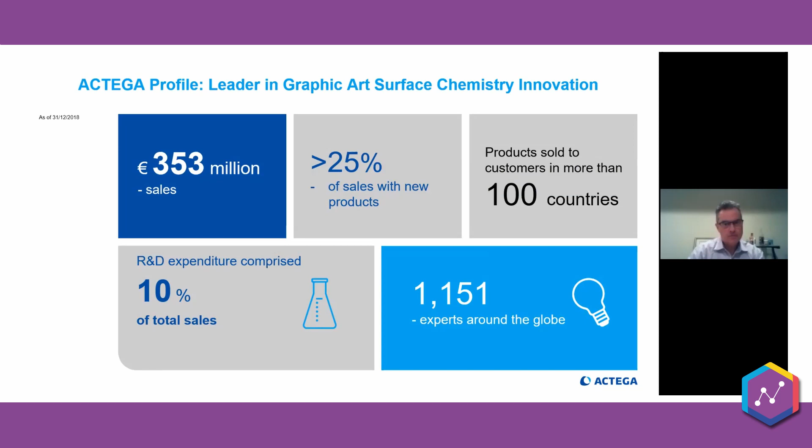We have basically a global footprint, with about 1,150 experts around the world supporting our growth. This gives you an overview of where we're located: North and South America, Europe, as well as Asia Pacific.

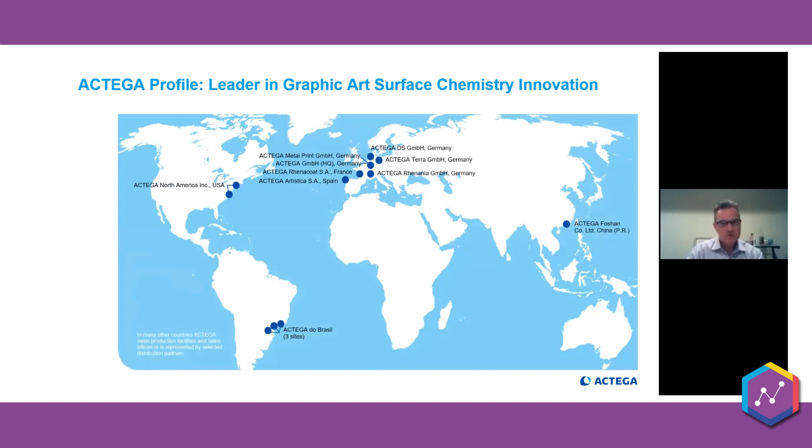Now I'm going to talk about ACTEGA decorating, and the concept itself is a print and transfer concept as opposed to a direct-to-shape printing concept.

We've called this technology for the past 2 years Project Crystal, so you'll notice there are a couple of articles out there with me referring to this as Project Crystal. We've decided we are at the moment going through a rebranding process for this, and that new product name will be launched probably within the next 2 to 3 weeks.

This is a fully patented process that we've developed. The chemistry as well as the hardware know-how for this process have been developed internally at ACTEGA at our R&D center located in East Providence, Rhode Island.

For the container decorators out there in the market that would benefit from this product, it's providing a unique way of printing and then transferring a very high quality graphic over to containers. All of the chemistry we've developed is specific to the process, as well as the carrier films, the release agents, and the hardware.

I frequently say, and folks have asked me this, if we take your hardware and want to apply our conventional pressure sensitive labels with it, it won't work because of the unique way we've designed this. We actually apply our decorations sticky side out, as opposed to how a conventional pressure sensitive label is applied with the face stock side out.

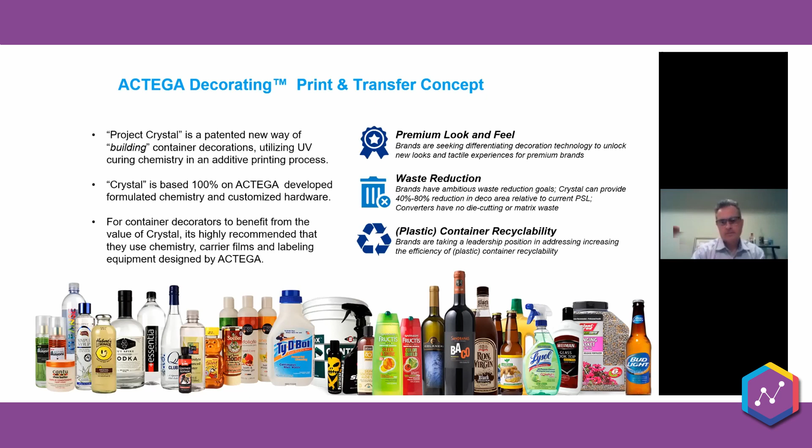So what is crystal decorating? In a nutshell, it's a new approach to decorating consumer products, rigid containers, using a very minimalist printing process and application process. Our process is basically a full Pantone process, and as I'll show in a couple of slides, the process today is printed in a 100% flexographic approach.

What we're moving into pretty soon is a hybrid digital flexographic approach, and hopefully within the next year to 2 years, we'll be able to transfer that whole entire approach over to 100% digital technology, based on some new developments in head technology that allow you now to print coatings where you couldn't before because of the high viscosity of the coatings.

So, what is ACTEGA decorating, crystal decorating? It really is a hybrid. It basically looks like a no-look pressure-sensitive label, but it has the feel of direct screen printing technology. One example is this container here, where you can literally feel the decoration as you rub your finger over it because of the high build we've applied to the container.

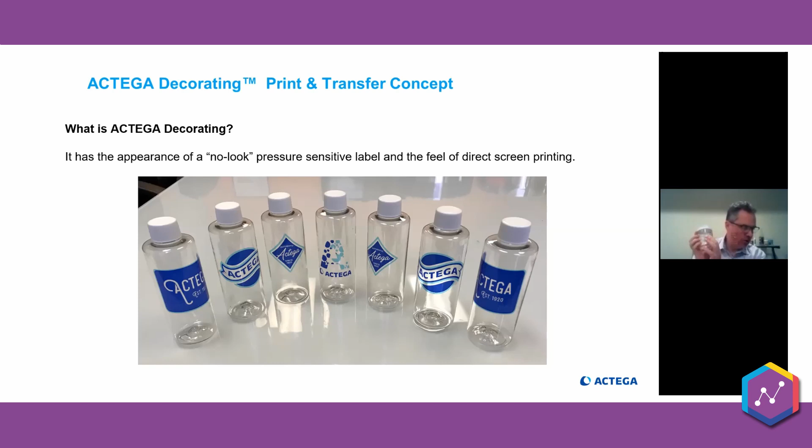The process starts off using a BOPP film that has a release layer on it - that's a biaxially oriented polypropylene film. First, we apply what we refer to as the L3 layer, or liquid layer, which in common vernacular would be called an overprint varnish. But our coating goes above and beyond that - it has a very robust profile that allows for high scratch resistance, high coating resistance, and high solvent resistance. So we're laying this layer down first.

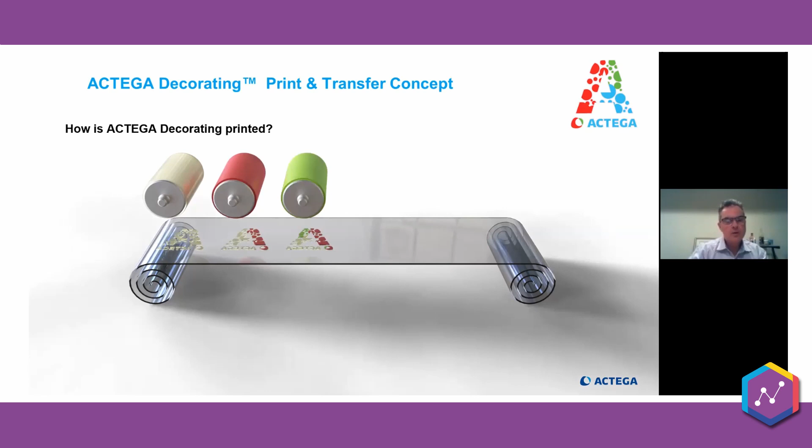This layer is laid down either as a flood coating or a spot coating onto the surface. After that, we apply our process colors over top of the L3 layer. In the final portion of the process, we lay down a spot white, and then a UV pressure sensitive adhesive. So literally it's building a pressure sensitive label in reverse without the need for die cutting, as I've just mentioned.

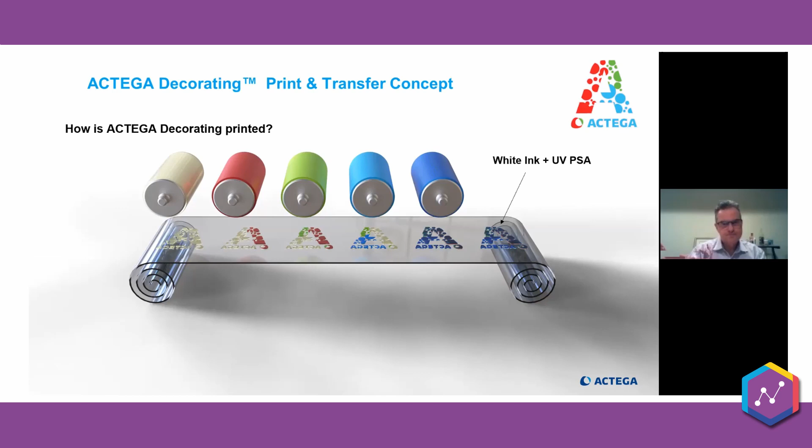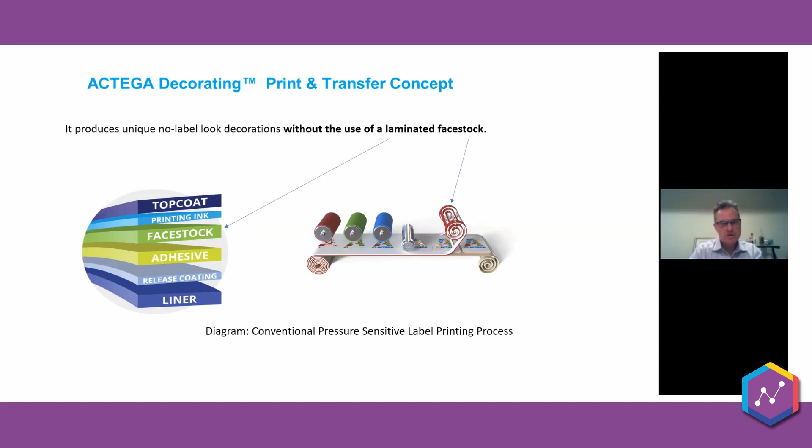If you look at how we build a crystal or ACTEGA decorating design versus a conventional laminate face stock pressure sensitive label, we're not using a face stock. That alone represents up front about a 30 to 40% savings in material typically used in creating a label design. On top of that, we're judiciously using the amount of adhesive required because we're spot applying the adhesive on the back side of the decoration stock. We're also minimizing several other things typically used in creating a label stock - there's no over-laminate with this technology because that's basically replaced with the L3 layer. The design area we're taking up has been minimized by about 80%, and the matrix we're using has drastically been reduced as well.

Yes, BOPP still is a plastic film. Yes, we realize plastic films at the moment are very hard to recycle in the market. Yes, we're also looking at other ways of carrying the decoration to the container by using either post-consumer recycled films or, hopefully aspirationally in the future, compostable films, which are totally doable - they're used today in the flexible packaging industry. So the converter, once they print the decoration onto the carrier film, it goes out to the container decoration house. If that house is located someplace with an entity that accepts compostable films after application of the decoration, they can ship those films to an industrial composter. So you're drastically reducing the footprint you're making with regard to putting stuff in landfill.

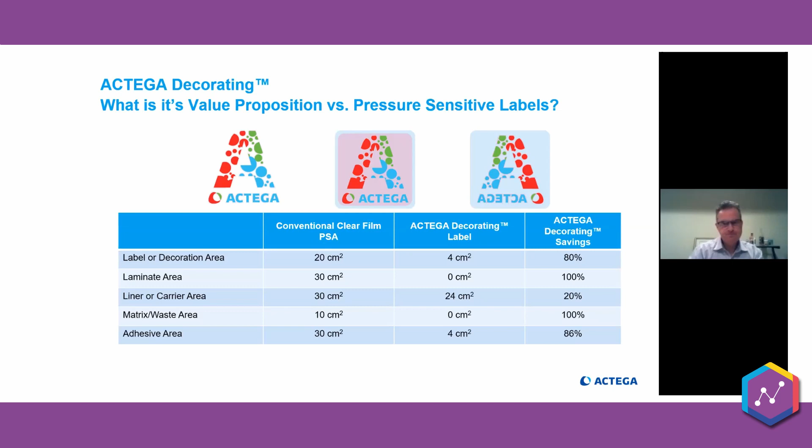So let's talk about how ACTEGA decorating technology compares to UV screen printing. For those who don't know much about UV screen printing, it's a process that enables the ability to apply graphics, logos, and designs directly onto container surfaces. It can be applied to glass, plastics, as well as metallics, and it uses dedicated color stations. It enables a lot of flexibility with regard to how you present your brand image, and also gives you the ability to make embellishments above and beyond simply the print. You can also add metallics as well as special effects onto the surface of a container using screen printing.

Our process allows you to print and apply very high opacity, full Pantone colors, with a no-look format, which is quite difficult to do with screen printing. You're also getting much better color consistency as well as control over color matching in-house with this technology over screen printing, because all of our designs are printed in advance using an inline flexographic process. There are no screens with this process, and no color or print registration required, which is needed with screen printing because it's all done with screens.

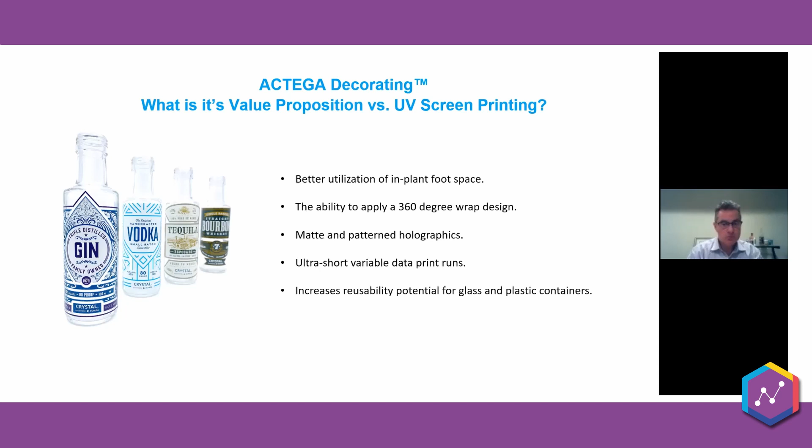With this technology, you also have the ability to do ultra short variable data runs if you're running the hybrid process as opposed to the flexo process. And once again, it also increases the reusability potential of glass as well as plastic containers.

So now let's talk about direct-to-shape printing. Direct-to-shape printing is growing quite quickly out in the market. It's a way to efficiently use piezo drop-on-demand printing in a full-color image process where you're printing directly onto containers. However, one of the caveats is you need a surface that's very homogeneous in order to get a full fidelity image created onto the surface.

So with direct-to-shape printing, you do require primer coating to go down to actually hinge the ink onto the surface of the container. And in most cases, to improve scratch and mar resistance, you have to put an overprint varnish down as well. So there are several steps in that process.

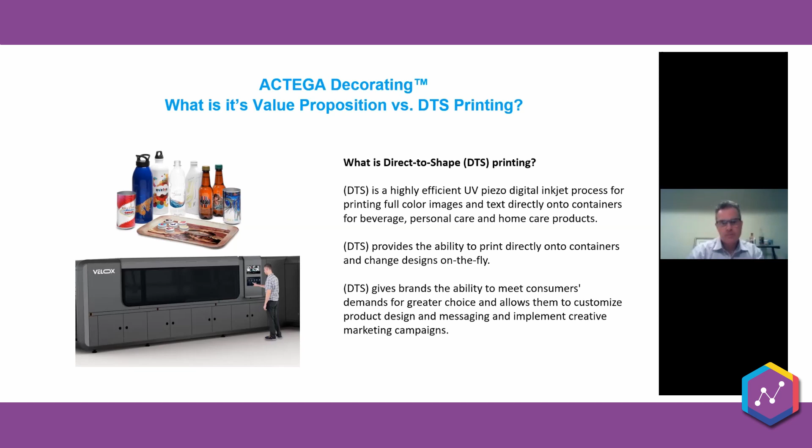Direct-to-shape printing printers come in a variety of sizes and shapes. There are smaller ones out there on the market that typically can process between 3 and 4 containers per minute. And then you have much larger ones, like from Velox, that can basically output literally hundreds of containers per hour, all depending on the cost of the equipment.

Our process alleviates the need for print receptive primers. It also alleviates the need for top coats because it's all built into the design of the ACTEGA decorating sandwich, if you will. It also provides the ability to incorporate, as I mentioned, matte finishes as well as holographics, which you can't really do with direct-to-shape printing.

It also encapsulates the layers onto the surface of the container in a way that when you do go to recycle the container, it'll exfoliate the decoration off of the container so you're not fouling the plastic. It gives the plastic the ability to be recycled very quickly and efficiently without creating cause or concern in the recycling process.

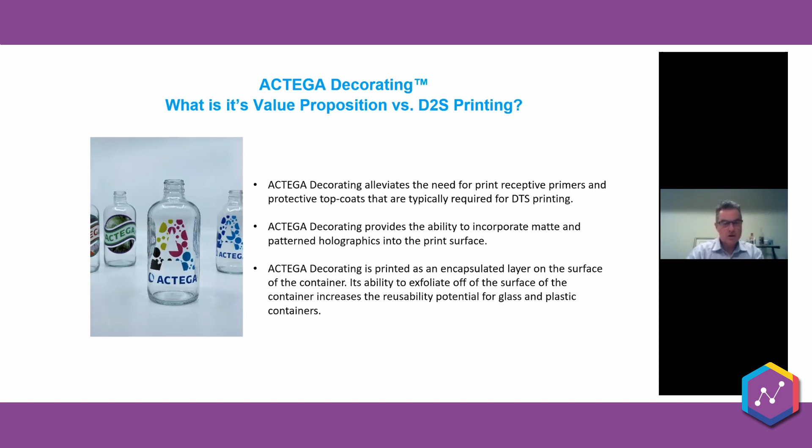Our decorating technology also gives the ability, with the way that it conformally lays on the surface of glass specifically, to basically camouflage certain defects within glass. We've also noticed that it can cover up defects or any types of ridges or seams that you see in plastic as well. It basically conformally lays on the surface and looks like it actually becomes a sublime part of the surface.

With our technology, we have the ability to dial in or dial out the molecular weight of the resin systems that we're using in the L3 layer. We can also formulate this technology so it complies with indirect food contact regulations or any type of skin contact regulations that the brand owner might have. That's really hard to do with direct-to-shape printing, because with direct-to-shape printing, you're using monomer-rich fluid systems that have a high propensity for migration.

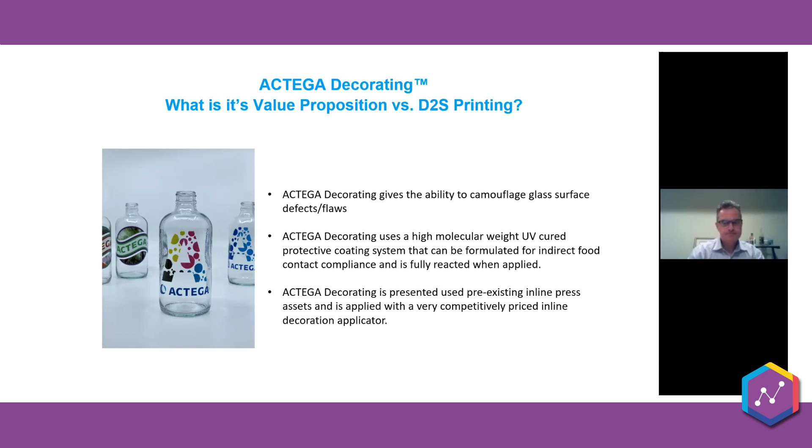So let's talk about the performance attributes of the technology. For solvent resistance, we typically do a lot of in-house testing using methyl ethyl ketone, or MEK, double rub testing. We know that with our technology, we get well above 50 double rubs with MEK solvents when we test them. Scratch resistance is extremely high as well.

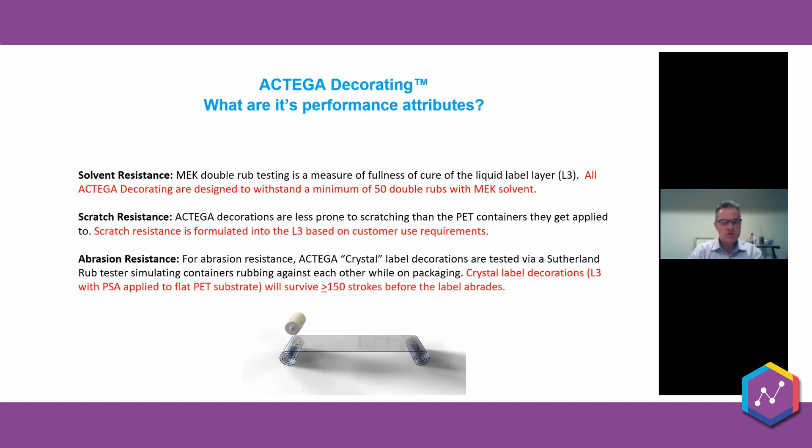With our technology, because it's a no-look type of technology, it makes the plastic very easily detectable to near-infrared sortation systems. Also, once it enters the recycling bath, it very easily separates from the plastic, allowing the plastic to be very easily recycled. It also allows for much higher bale yields of plastic, as opposed to having parts and bits of labels shipped off with plastics to a converter.

We've also run our technology on PET, and we work with the Association for Post-Consumer Plastic Recyclers. We've run our technology through what they refer to as their PET-S-04 thermoform label testing. In a Tier 5 full press build, we've successfully demonstrated that our decorations will fully exfoliate off of the PET plastic, allowing that plastic to be recycled very easily.

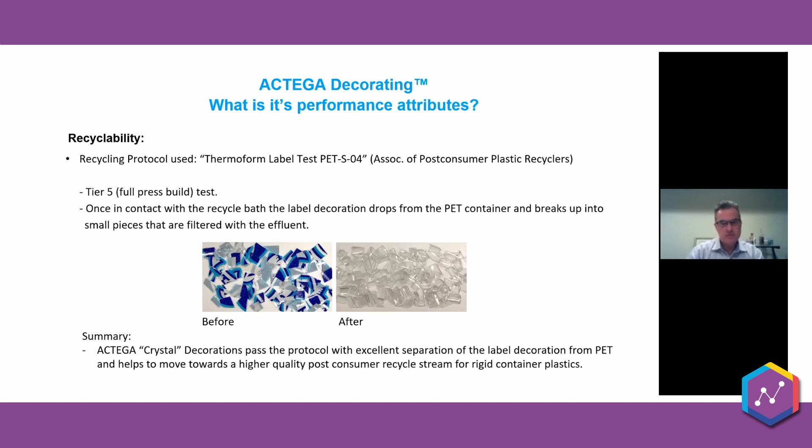Now let's jump into hardware and the hardware we've designed for this technology. If you were to walk into our labs in East Providence, Rhode Island, on the right-hand side of the building we have all of our chemistry folks formulating and doing application testing with the decorations we're developing. On the left-hand side, we have our engineering team, responsible for developing the equipment needed to apply the chemistry from the right-hand side of the building.

We've developed our own inline decoration applicator for this technology. On the surface, it's a very simplistic, straightforward piece of equipment. However, its glory is the ability to take very thin films and transfer decorations no more than about 25 or 30 microns off of that 1 to 2 mil BOP film, transferring it directly and efficiently onto a container flying past it on a conveyor system.

The applicator we've designed is simple and straightforward. It runs off a single 110 volt, 15 amp outlet. It's designed for controlling containers in a very high throughput fashion for high transfer accuracy. It reduces electromechanical complexity for maintenance as well as integration of the system. The system we've designed could literally be parked on an inline filling system if you wanted it there, and it provides a very simple wet path for decorating the containers.

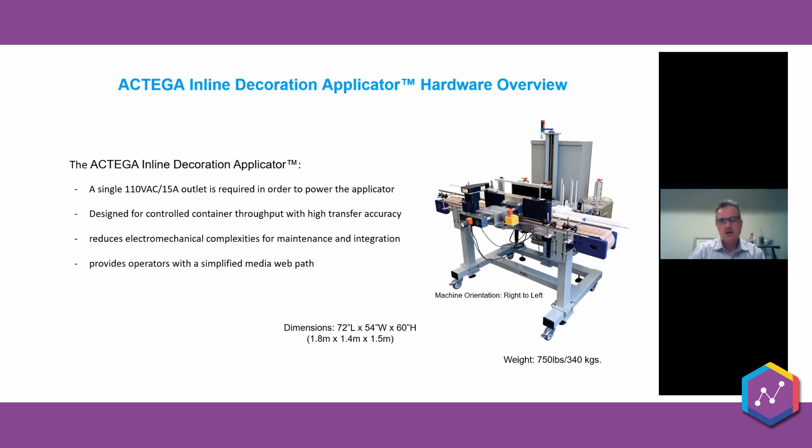This system at the moment can address containers up to 6 inches, or approximately 15 centimeters, in diameter. The height it can address is also containers as high as 8 inches, which is fully within the realm of a 750 or 700 milliliter wine, a glass wine bottle.

We also ship this with at least 5 of our application pads that range in size from 3 all the way up to 15 inches. The size of the pad is in tandem with the size of the container decoration that needs to be applied to the container.

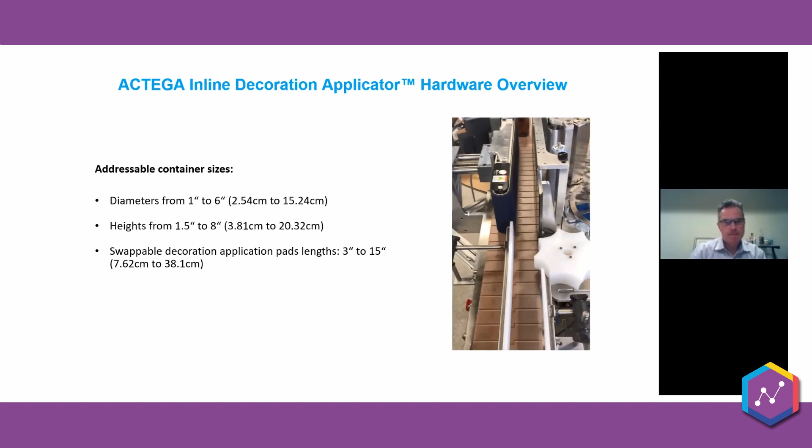This is a close-up of the application zone of the inline decoration applicator, and I'm going to run briefly here the video footage of this, which shows you it transferring decorations over to glass containers, jars.

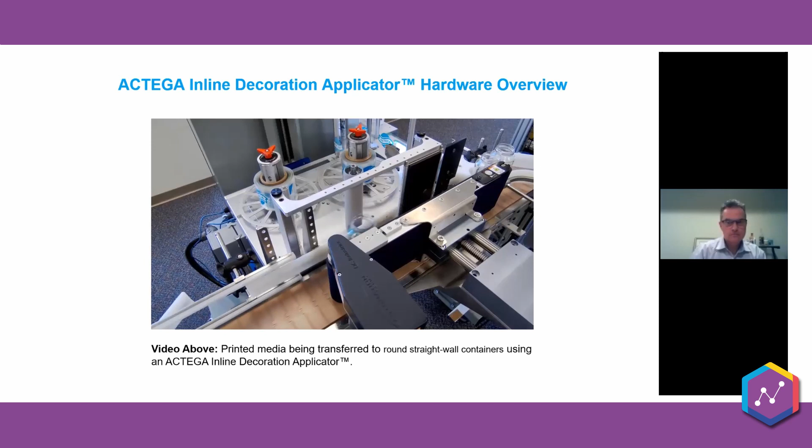Safety is really important for us at ACTEGA. We've had several safety reviews with the equipment. It complies with NFPA 79. There are e-stops not only on the control panel of the system, but also in the adjustment stage application belt area.

And once again, the way that we've designed the system, it also has a plug-in on the side of the control panel so that you can add additional e-stop relays if you want to integrate the system into an inline process.

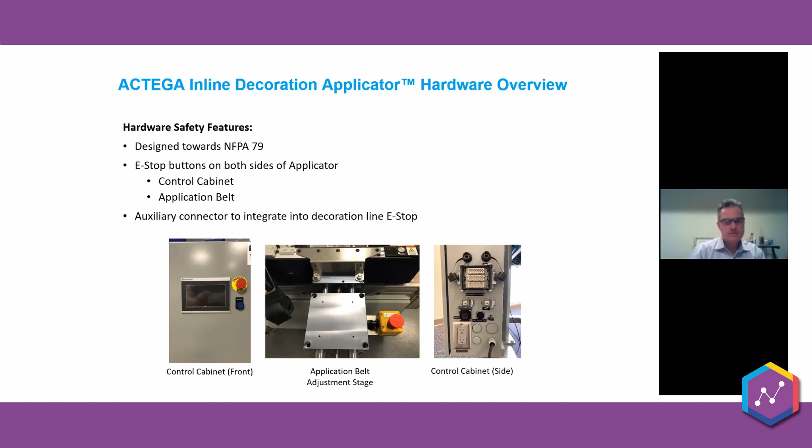The system also requires, depending on the container type that you're applying the decorations to, that there's flame treating or surface treating before the container has the decoration applied to it. Here quickly is an example of glass containers being flame treated and then transferred over to the applicator where they get their decoration applied to them.

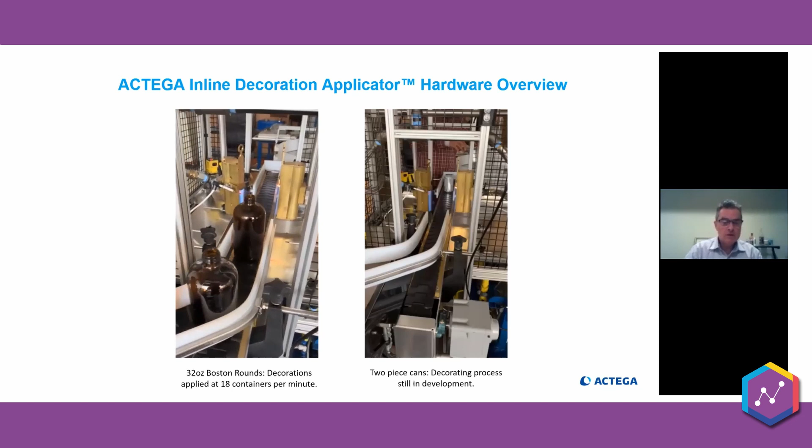We are in the process of formulating a pressure sensitive that will hopefully not require flame treating in the near future, which will negate the need for a flame treatment system.

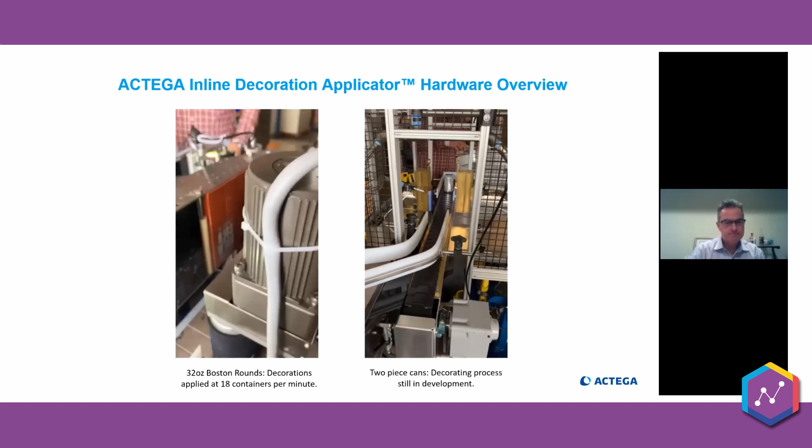Let's talk about the business model that we've developed for this. Our plan is to more or less find homes for about 25 of the inline decoration applicators in North America as well as in Europe in 2021.

So for that, we are in the process of reaching out to several OEMs to find if there is interest in having them build these systems for us. We would hand over basically the designs as well as license that capability out to them so that we can further ramp up this technology on the hardware side out into the market.

We would then send the modified artwork out to the printer or the converter, and they would be doing the printing, the converting locally, and then supplying the decoration house or the brand locally the media to put onto the applicator that we've parked at their location, as opposed to us shipping that media all the way from Providence, Rhode Island to someplace like California or London.

We would basically, once we've met the brand owner or the decoration house, ship out to them the inline decoration applicator. We would work on the artwork initially with them, then ship them at least an idea in Adobe AI format of what the artwork would look like. They would either thumbs up or thumbs down the artwork, then hopefully provide us with the PO. Then we would get to work having the artwork printed, doing further QC internally with the artwork, actually applying it to containers and making sure it presents the right way.

If we then get further approval from the brand or the decoration house on the artwork, we would ship them the printed roll. They would run the design on the applicator at their location and fulfill their order. After the first time doing this, it becomes a lot simpler, basically a continuous loop of receiving the artwork, approving the artwork, applying the artwork to containers, quality controlling up front, and then shipping the decorated containers off to their brand.

So for my presentation, the summary is that ACTEGA decorating is a patented technology which uses UV chemistry and application hardware know-how to decorate rigid container products. ACTEGA decorating is 100% based off of ACTEGA formulation and hardware know-how. All artwork, surface chemistry, carrier films, and labeling equipment use our know-how and technology that's been pre-approved. So if you were to try to take our chemistry and apply it using somebody else's labeling device, it's not really going to work.

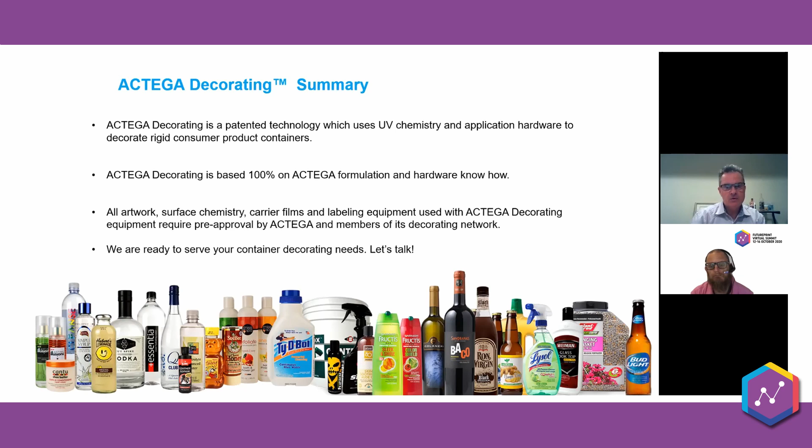We're really ready at this point to start collaborating with brands as well as decoration houses out in the market. We're ready to talk to you about how we can make that happen with you. So with that, thank you very much for your time today, and that's my presentation.

Thank you, Anthony. That's excellent. It's very exciting possibilities you're providing the market there, and at a time where short run in particular is of interest to some of the smaller organizations. You mentioned to me before a little bit about direct to shape beverages. Is that a kind of potential key market that you see in the future?

Yeah, absolutely. If you take a look at our technology and the cost of placing it in the market versus applying direct to shape, direct to shape technology has a lot of upfront costs associated with it and capital equipment. If you look at the regulatory side with direct to shape printing, you're using high monomer content inks. My concern with that technology is whether the ink is fully cured when applied to the container, and whether you're getting any residual chemistry coming off the container. Is the container fully cured? Whereas with our technology, we have a way of making sure the chemistry is fully encapsulated and does not migrate.

We also have ways of minimizing the potential for concern with regard to the ingredients used in the technology once it's applied to the container. So we think there's a lot of benefits to using our technology from both a cost perspective as well as a regulatory perspective, and also a recyclability perspective versus direct to shape printing, that we bring to the table.